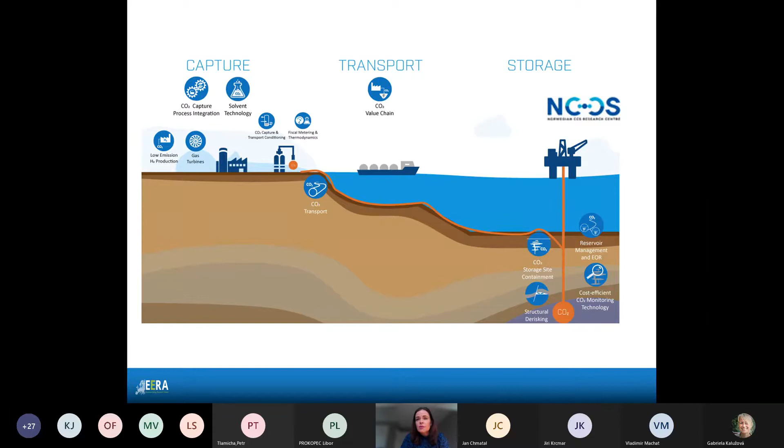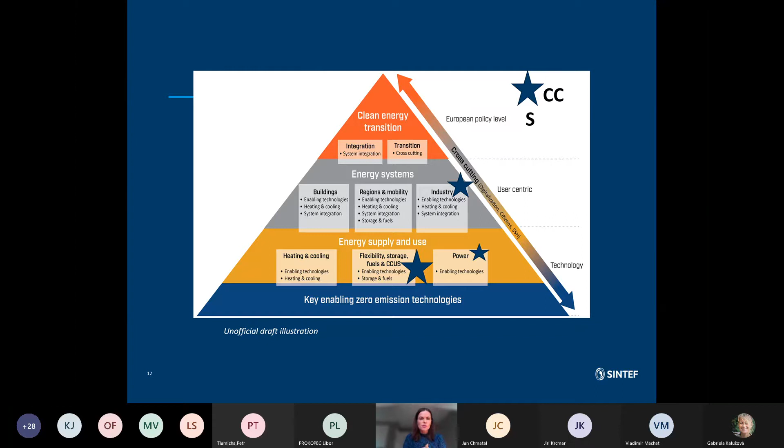It's not to show you details, it's to illustrate that during the process of asking member states if they are interested in participating in this partnership, different countries have been asked, and the colors illustrate the different countries' responses.

The interest for CCUS was quite high, and I will encourage you to have a dialogue with your ministries about this, because in the coming weeks and few months, the different countries will decide how they would like to participate and in what areas. So if you want your country to participate within the field of CCUS, you should let them know because this is a dynamic process.

From the Norwegian side, I just want to mention the climate program. In the climate program, we are this year working on our program plan, and input and feedback is wanted from the research community and the industry in this work. I'm really looking forward to it, and there will be an outreach process to ask for input on this. It's a natural stage after the launch of the Longship project.

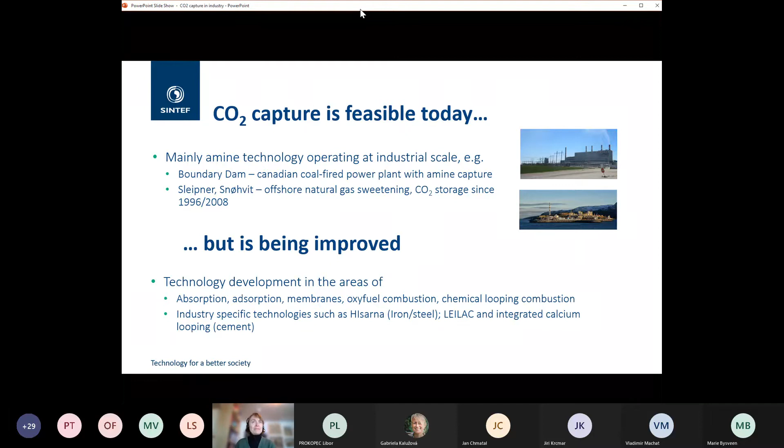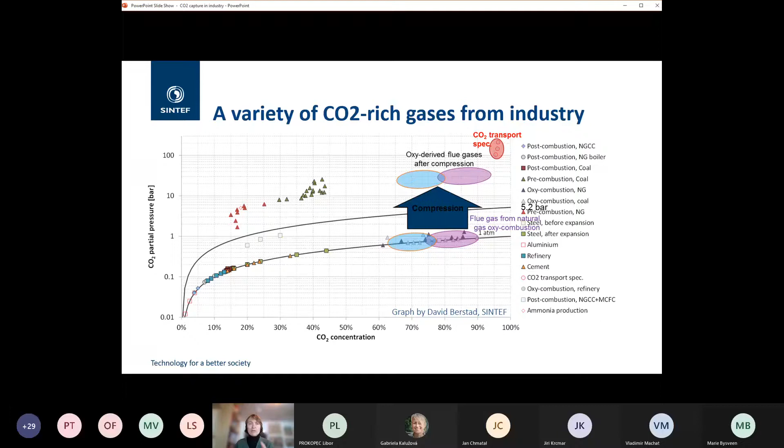So we have different pressures, different CO2 concentrations, and of course also different impurities. So it's not to say that, oh, the neighbor plant did that. You have to check what is relevant for your industry

and what technologies are available, what can be suitable for us. So I want to give you an example of how this has been done for some research for the cement industry, but hopefully there are also learnings from the methodology or approach for other industrial sectors. We operated from SINTEF EU-funded project on CO2 capture from cement in 2015 to 2018. We said we wanted to prepare the ground for large-scale implementation of CO2 capture in the European cement industry. We also have a website with videos and some presentations, a lot of material, if you're interested in looking more into this.

We looked at several different capture technologies in this project. There's oxy-fuel, where you burn with oxygen, chilled ammonia, which is an absorption, membrane-assisted liquefaction. I won't go into detail on this, but the point is there are many different technologies that can be relevant for one industry.

And they can be fundamentally different. They have different strengths, they have different challenges, and then what is suitable for me? That's the question. For instance, the energy provision is different. You can see that a couple of these use power. One uses both steam and power. Another one uses fuel and power.

And then it's all, again, back to, okay, my plant, what do we have? Do we have access to steam in our plant or from a neighboring industry? Is it easier with just power supply? Is it easier with fuel? Because a fundamental thing is that CO2 capture will require energy. It will cost money. A research project can't change this, because not requiring energy would break natural laws if somebody told you something else. Then if you're going to install something, it's going to cost money.

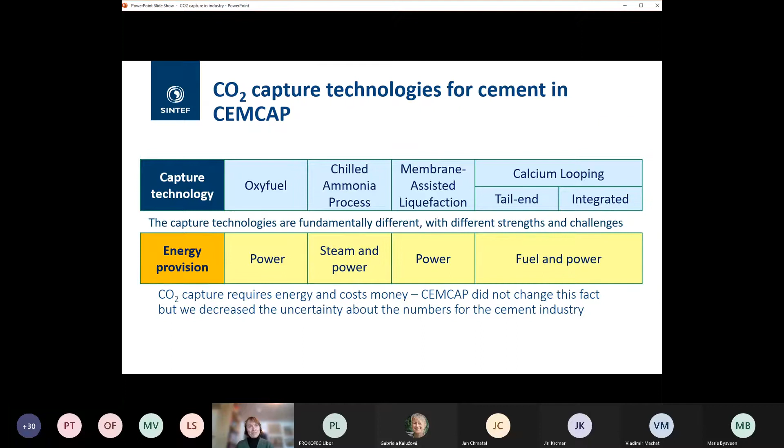But what we did in this project is that we decreased uncertainty about the numbers. We understood more about the technologies also for the cement industry. We had a methodology in this particular project where we had a tight integration between the analytical work, where we looked at the performance, the retrofitability, and a lot of experimental work to understand more under cement operating conditions, since

the CO2 concentration in cement kilns is higher than for power. You're about 20% instead of 12 to 15% that you would be for coal. And that was quite new when we did this in 2015 on such a broad scale. So we had a tight connection there. And then we also had a common framework to make sure that we did the analysis and the experimental work for the same kind of flue gas conditions.

So we had some results on the techno-economic performance. What was the cost of the clinker, the raw material for cement? What was the cost of avoiding CO2? So we could have a comparison and understanding this.

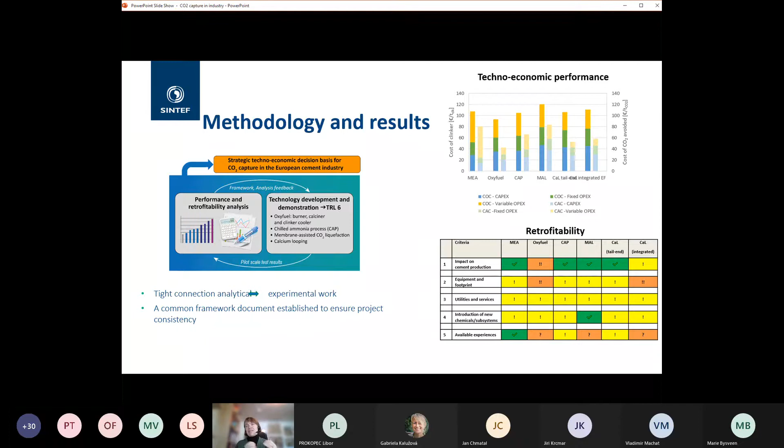And we also did a retrofitability analysis. We said it would be like a traffic light chart with green, yellow, and red, but then we realized there was nothing that was red in terms of showstoppers, so more like orange, so a little bit more challenging. But that was a very useful exercise to really go through and systematically analyze different aspects of the retrofitability for CO2 capture in a cement kiln.

Then we also did a CCU study, which can perhaps be of general interest. A lot of work has been done since this on CCU. This is an area that's really increasing in activity. What we looked at then was that, we have a potential carbon source in a fossil fuel-free future. That's what you can think when you're doing CCU.

We looked at, I shouldn't say we, but TNO was leading this study, but the consortium looked at 16 different CO2-based products. And they were evaluated with respect to market, energy demand, maturity, and what's the price, how much can be paid for this product if you produce it. As you can see, there's nothing that's green all over. But

also if you look at the CCU routes, they have a limited opportunity for climate change mitigation, which is somehow the fundamental thing why we want to do CO2 capture that we mustn't forget about. And also if you look at the quantities of the products, it's perhaps 10% of CO2 from a cement plant, or for a few cement plants that could be used for CCU was the estimate then. And there can be niche applications with positive CCUS business cases, because a conclusion from this study was that CCU will always need the S.

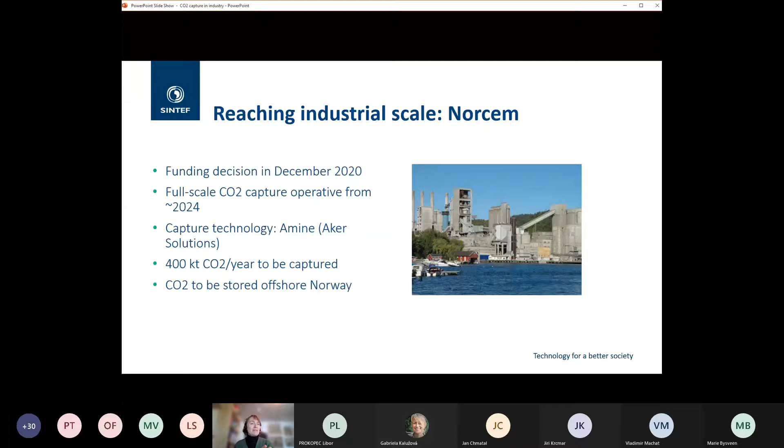CO2 capture from cement is also reaching industrial scale now, with Norcem making a funding decision in 2020. A full-scale CO2 capture will be operative from 2024 with amine technology. About 400,000 tons of CO2 per year, kilotons of CO2 per year, will be captured and stored offshore Norway.

There are lots of initial questions to ask yourself when considering CO2 capture for industrial flue gases. This is like a checklist to look at when starting a CO2 capture project: What's the pressure and temperature where you can capture CO2? What's the CO2 concentration? Do you have impurities? Do you have waste heat available? That can really drive down operating cost. Do you have space for installing or retrofitting the CO2 capture? That can be problematic in some industries.

And what are you going to do with the CO2? CCU will probably need someone who can take care of the CO2 and get it away from your industrial installation. And of course, you must always remember the quality of your end product.

Finally, if you're initiating a CO2 capture project, don't reinvent the wheel. We have, for instance at this conference, a lot of competence built up over more than 20 years in Norway, largely thanks to the climate program that Marie mentioned. There are also two important European fora you could check: the CCUS Projects Network and the Zero Emissions Platform. The CCUS Projects Network is more internal knowledge sharing between industrial projects with plans for CO2 capture, use, and transport, while the Zero Emissions Platform is the industry CCS voice towards the EU Commission. There are also a lot of reports and information available on these two websites.

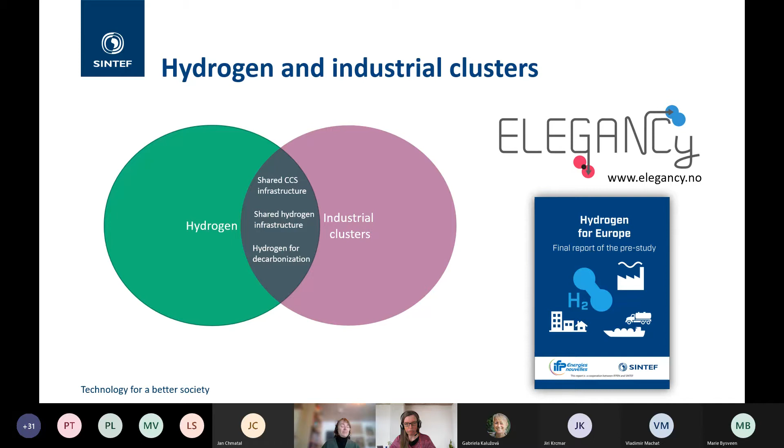Let me start with the benefits I see for the industrial cluster of having hydrogen production in the nearby areas. As I said in the introduction, we need to decarbonize the clusters. Important strategies for decarbonization are capture of CO2 at the point emitters and then permanent storage. A second alternative could also be the direct use of hydrogen as fuel instead of fossils.

In the Hydrogen for Europe pre-study, we assessed the benefit of having hydrogen production from natural gas with CO2 capture, which also requires infrastructure for transport and storage of CO2. What we saw was that if you have co-location between an industrial cluster and this kind of hydrogen production, you'd be able to share infrastructure for transport and storage of CO2. So the CO2 captured from the industrial cluster itself would be transported in an infrastructure with economies of scale, lowering the cost per kilogram of CO2 for transport and storage, thereby reducing the cost of decarbonizing the industrial cluster itself.

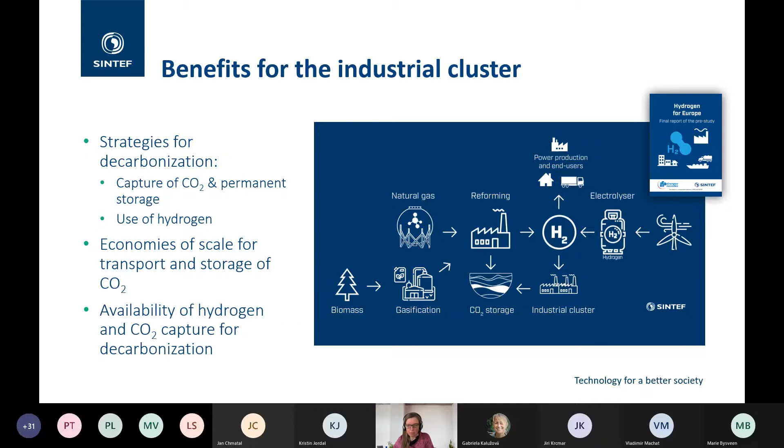The second result I'd like to show is also from work undertaken within the Elegancy project, from the UK case study. Nixon Sunny, who did his PhD within the project, has kindly let me use and present some of his findings. These are results for cost of avoiding CO2 emissions for a large-scale refining and petrochemical cluster that has scattered emission points - approximately 3.5 to 4 megatons of CO2 emitted per year at this cluster, with the majority resulting from direct combustion of fuel. The emissions have around 10 mole% CO2 in the streams.

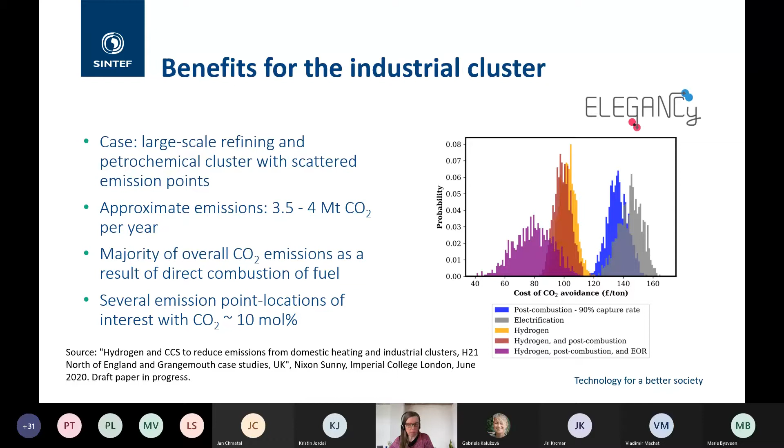And this is also quite costly. So when we move down towards the brown profile, where we have both hydrogen and post-combustion, this comes at a significantly reduced cost profile. And for this particular case study, they also did estimates for a case with enhanced oil recovery, which was seen to further reduce the costs. However, they also noted significant uncertainties related to geological reserves, market price for oil, and the CO2 intensity of the oil that emerges, which brings substantial uncertainty into the results for this last curve.

So then if we turn our eyes towards the benefit for the hydrogen economy, I would like to bring to your attention a proposed policy to boost momentum in key value chains, made by the IEA in their Future of Hydrogen report prepared in 2019, where they said that strategic development of industrial clusters for scaling up the use of clean hydrogen was key.

So they saw that you could have a growing hydrogen demand in the industries, and this could both bring down the costs of the low carbon hydrogen pathways, and by bringing down the costs of hydrogen, you can also kickstart new sources of demand for hydrogen. And in their reports, they specifically pointed towards coastal industrial clusters co-located near ports, saying that these kinds of clusters are specifically attractive.

And we have also seen the same in the Elegancy project, where, as I said, we had 5 case studies. We saw that national conditions are very important for establishing and assessing the business case for hydrogen and CCS value chains, and there were quite significant differences in terms of what was driving the business opportunity for the chains. But what we saw was that industry and industrial use of hydrogen was key to getting the hydrogen economy started.

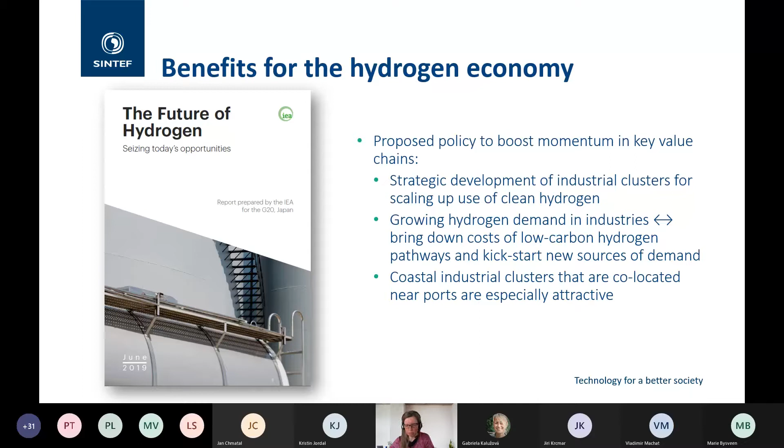So I would like to show you one final example of how industry clusters and the use of hydrogen there could benefit the hydrogen economy. This last example is collected from the Dutch case study of the Elegancy project that examined the potential for hydrogen in the Rotterdam area.

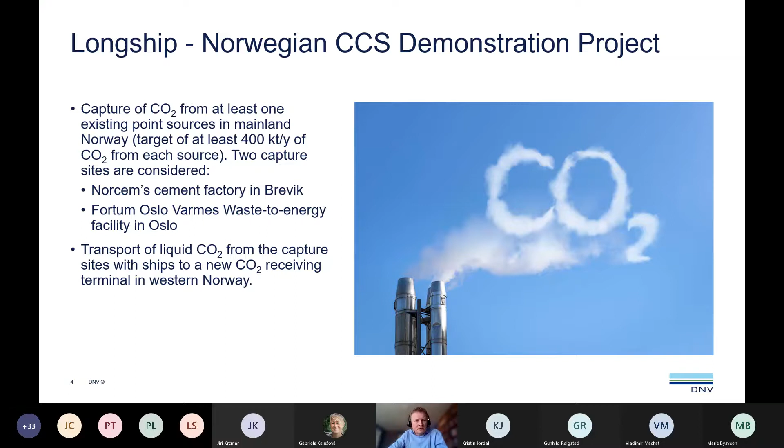To my knowledge, Norcem Brevik may become the world's first cement factory equipped with a CO2 capture plant. And we have seen that there are no other good alternatives for CO2 emissions at cement factories than CO2 capture.

The capture plant's energy demand, steam and heat, will entirely be based on surplus heat. If you have waste heat available, it can be used to power the CO2 capture. The CO2 emissions will then be reduced by 50%, from 800,000 to 400,000 tons per year. The reason why they're not capturing more is that's the amount of heat they have available. If they should capture more, they would typically have to invest in a steam generator plant.

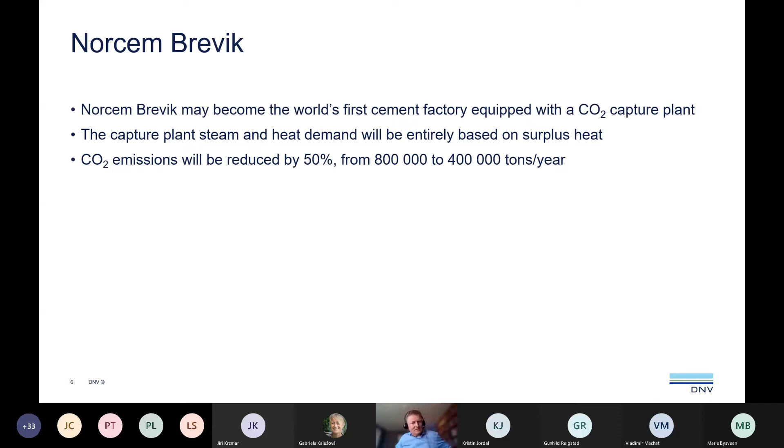When it comes to new technology, the Norwegian authorities have required that either proven technology is used, or if you have to use new technology, or if the application of new technology has significant upside, it shall be qualified. DNV has issued a recommended practice on technology qualification, which can be applied, or equivalent. For those parts of the technology identified as new technology, the technology qualification programs shall be established and executed in alignment with the project master plan.

In our RP, we define technology qualification as the process of providing evidence that the technology will function within specified operational limits with an acceptable level of confidence. So it's a requirement from the authorities to have a third-party verification of the technology, that it works as intended, and to reduce the technical risk.

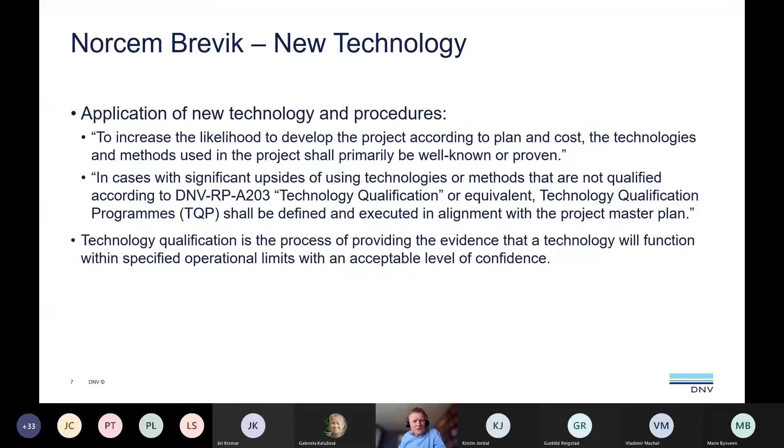Based on this definition, the following processes or subsystems were identified for qualification: the capture technology itself, which is provided and conducted by Aker Carbon Capture; the CO2 compression with integrated waste heat recovery, also a technology delivered by Aker Carbon Capture; and finally, waste heat recovery from the cement plant using smoke tube boilers, conducted by Norsk Energi, which is the provider of the boilers.

The process that DNV describes in our recommended practice is a stepwise systematic approach to ensure that you collect the evidence needed in order to have an acceptable residual risk regarding the performance of the technology. It starts with a qualification basis, which is a description of the technology to be qualified and a description of what it's going to be qualified for, so the typical operating envelope, performance targets, and functional requirements. That has been established.

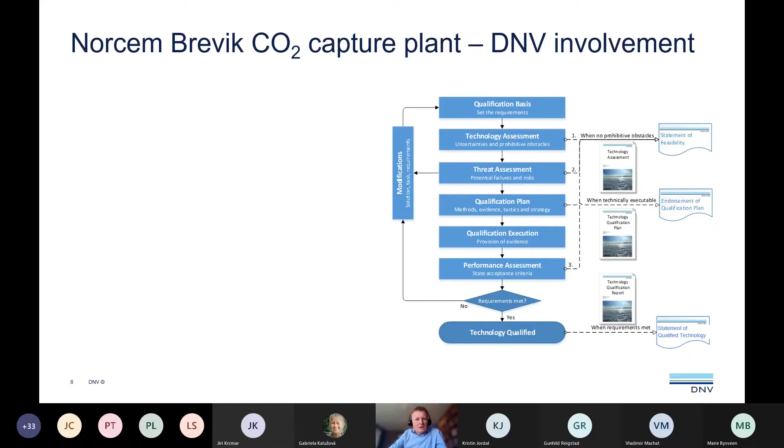In addition to this RP A203, we also have a more specific recommended practice on qualification procedures for carbon dioxide capture technology. It's based on the same process, but gives more guidance specific to this industry.

So in 2019, we ran a project for technology qualification of the CO2 capture technology. And in 2 phases, starting in 2017 and finalizing in 2019, we ran a process for qualification of the CO2 compression with heat recovery technology.

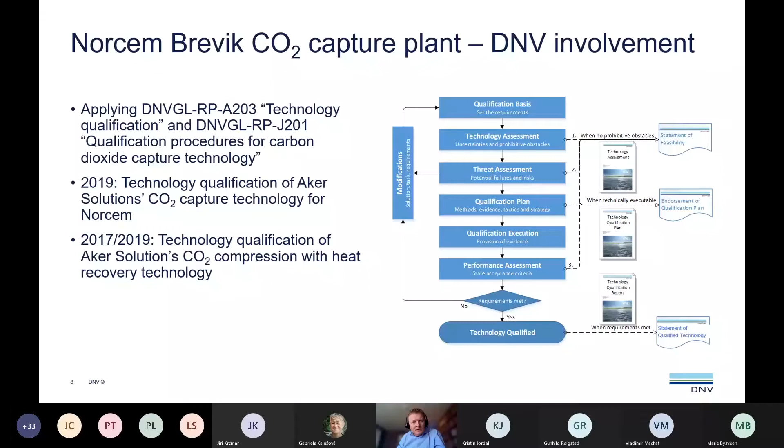So that is one major part of how you can get sufficient heat to power the capture process - by recovering the heat generated in the compression process.

Finally, we also had a 2-phase project with Norsk Energi, which is providing the boilers, and one of the main issues there, which made this defined as new technology, was the content of the flue gas and the high amount of particles in the flue gas.

So I mentioned the first steps in the qualification process. We have a technology assessment, threat assessment, where we identify novel technology and the related challenges, uncertainties, and potential failure modes.

That was mainly done in a 2-day workshop in Oslo, where we had participants from several stakeholders - technology provider, technology and end user, Gassnova, which is the governmental body regulating this, from TCM, and from different DNV offices as well. Based on this workshop, we got a list of items that we had to find evidence had been taken care of.

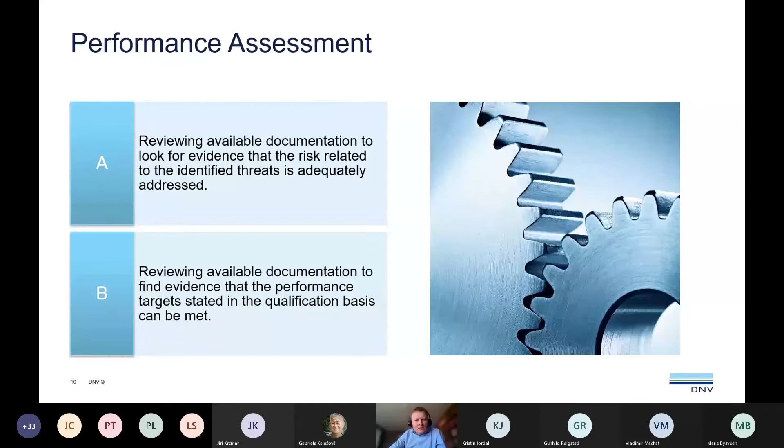In practical terms, for each of these threats that we identified - this is just an example, I don't have permission to show the details from the report - but one threat could be that the solvent concentration became too low.

We then found references in the documentation, especially from the pilot testing - MTU is mobile test unit - where we discussed the evidence, if that was sufficient to rule out this risk of a low solvent concentration.

We made then a conclusion and also an assessment of the residual risk of this still occurring.

Based on these three different projects, we have issued a statement of qualified technology, stating that this technology is ready for use within the limitations given in the qualification basis. And all these projects were specific to the Norcem Brevik plant.

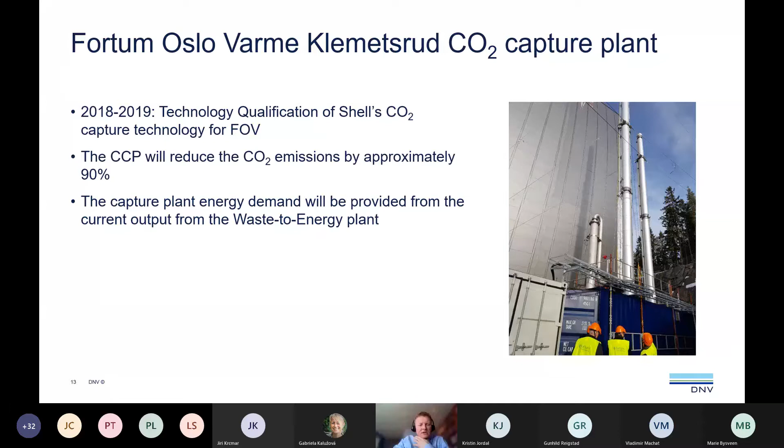At this plant, the CO2 emissions will be reduced by approximately 90%, and plant energy demand will be provided from the current output from the waste to energy plant, so it will of course reduce the energy provided from this plant.

The captured CO2 will then be transported by trucks to Oslo Harbour for storage and ship transport to the western part of Norway.

So our involvement here was also in two phases. 2018 was mainly going through the existing documentation and experience from existing plant, where the involvement in 2019 was to follow up pilot testing at Klemetsrud. Because one of the conclusions based on our involvement and also other work was that it was required to have a pilot test with the real flue gas at site. That was successful pilot testing, and we also issued a statement of qualified technology around summer 2019.

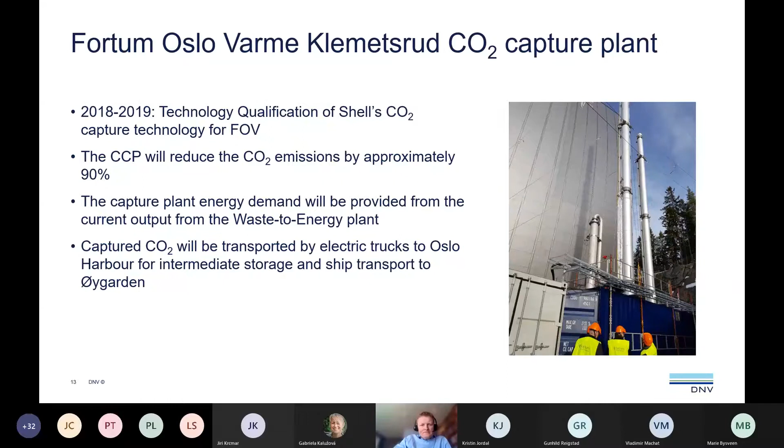So to wrap up, full-scale carbon capture processes have been qualified for the intended use in the cement industry and for waste-to-energy plants. And the first full-scale CCS project in the cement industry has received full funding from the Norwegian government, as we saw in last December. An offshore storage facility in the North Sea will be established with capacity of storing CO2 from those two capture projects, and also with capacity from several additional sources.

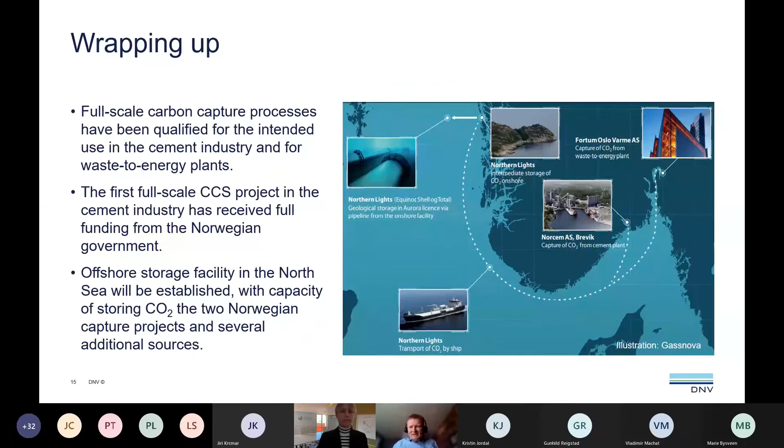Okay, that was what I intended to say today. So if you have any questions to this, please go ahead. Yeah, there is one question in chat.

Yes, so the final usage of CO2 is to store it on the continental shelf in the underground reservoir to get rid of it. There's no end use of this CO2. And yes, you will avoid then CO2 tax on this CO2. That's one of the main financial drivers behind this, to avoid those taxes.

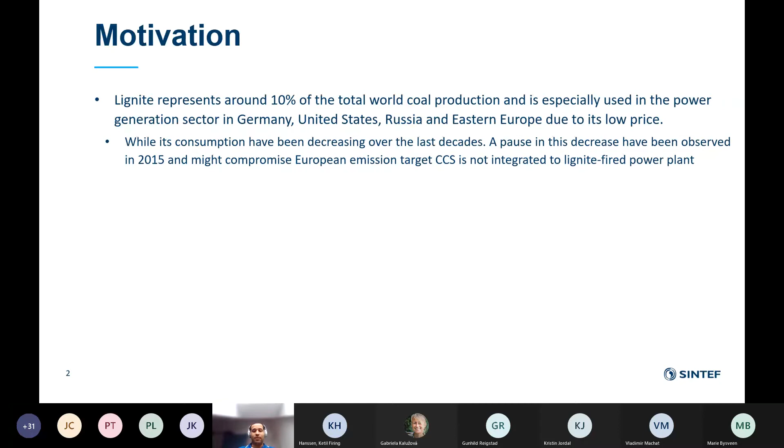So here we've been actually looking at the potential of implementing CCS on the Vresova IGCC power plant, which I guess many of you know. It's a power plant in Czech Republic, and I'll get a bit more detail on that. But the focus of the study has been to look at technology to capture the CO2 here, as the solvent is of course the most mature option and has been demonstrated, but other emerging technology could have a potential to reduce cost.

So this is what we've been focusing on, in terms of looking at in total 3 CO2 capture technologies. And also we have looked afterward at how to transport and store the CO2 coming from that IGCC, which is of course a very important issue and can be challenging, especially when you look at one plant.

So this project was actually led by the Czech Technical University in Prague, and the partners in that were SINTEF Energy Research and UJV Rez, actually. And the goal was to understand the technical and economic feasibility of CCS from this pre-combustion coal power plant.

So, as I was saying, we've been looking at the Vresova IGCC plant, which is in a sense a rather unique plant because it was actually a town gas plant which was built in the 80s, if I recall properly, and then town gas stopped being used in Europe. And then what has been done is that they actually converted that facility into an IGCC plant. So it's actually the only lignite-based IGCC plant in Europe.

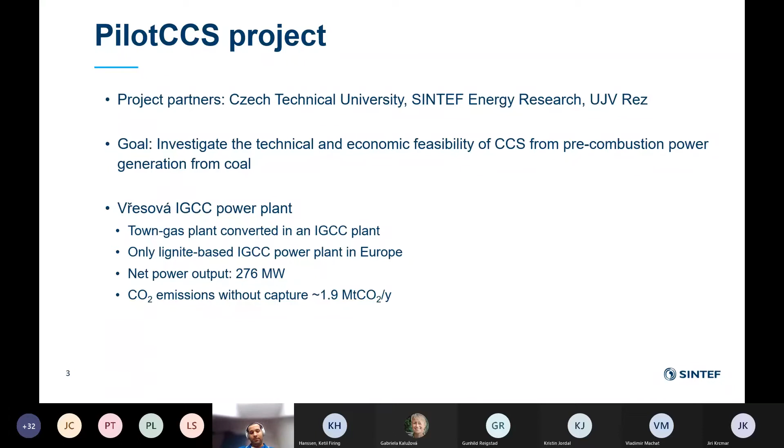If you don't know so much about IGCC, I'll provide a quick overview. The idea is that you have coal, which is first prepared and then gasified into syngas, which needs to be cleaned. There you have mainly some hydrogen, some CO, some methane, and products like that. You need a cleaning step because you have quite a bit of sulfur also. Then you recover heat to produce steam and generate more power.

Then what can happen is that you go to a CO2 capture unit, pre-combustion. Your syngas here mainly contains hydrogen, CO2, some CO, and other components at a rather high pressure, usually around 30 bar, with a high concentration also of CO2. The idea is that you get hydrogen after CO2 capture, mainly hydrogen-rich fuel, and then you add nitrogen, and this is used in a gas turbine system to produce power, and you can also recover steam to produce more power afterward.

Of course, implementing CCS will result in modification of the plant. So you need to, for example, modify how you remove the H2S to really maximize that you get just the H2S and then recover the CO2 separately.

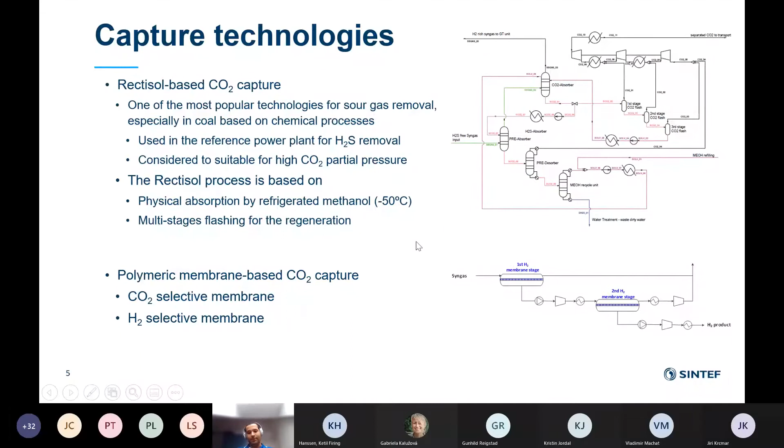So you have here a CO2 rich mixture, and then you purify it through a flash. The interesting part is that here you get liquid CO2 at around 7 bar and -50 degrees. And then you can just pump it and pass back the heat to the rest of the process to get higher temperature CO2. So it's a process which combines what is usually called CO2 capture and the conditioning also.

And then here you have your hydrogen-rich syngas, which is then passing through an expansion system to recover the heat spent into the compression, and then can go back to the power generation part.

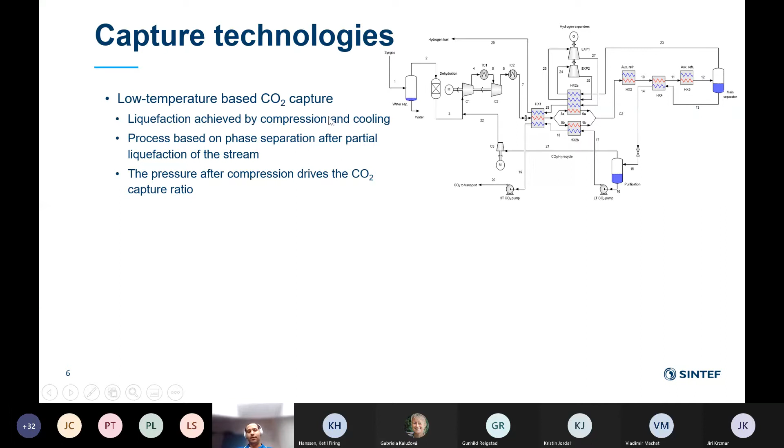One thing that can be said about that is Sintef Energy have a low temperature pilot facility that can actually capture 10 tons of CO2 per day. It's been mainly used for post-combustion capture, but I think my colleague, if I recall, is working on converting it to hydrogen. I'm not sure if it's already completed yet.

But the capture cost and conditioning overall is below 50 euro per ton, which is actually not a bad cost in early stage also.

One other thing that we looked at, because what can be challenging especially when starting a project at an early phase, is to capture everything. So we also look at what we call partial capture. For example, instead of wanting to capture 85% or 90% of the CO2 emitted by the plant, you want to only capture 50% because you rather start with something which is a bit more modest. Like for example, the Norcem plant, as was just said earlier, where they capture 40%. And what we looked at is what impact this had on the technology comparison.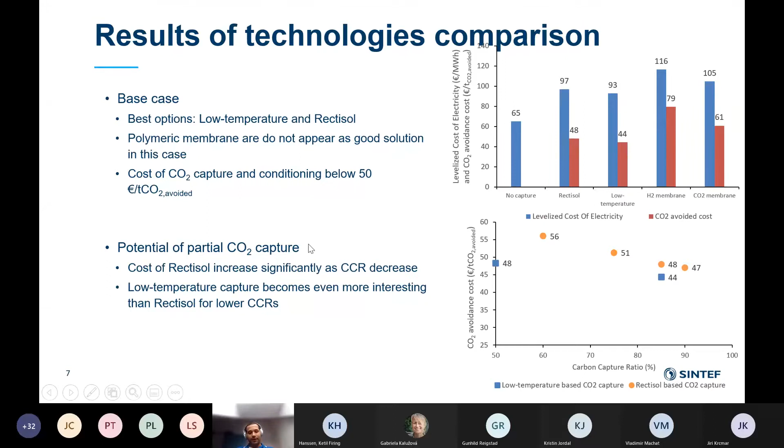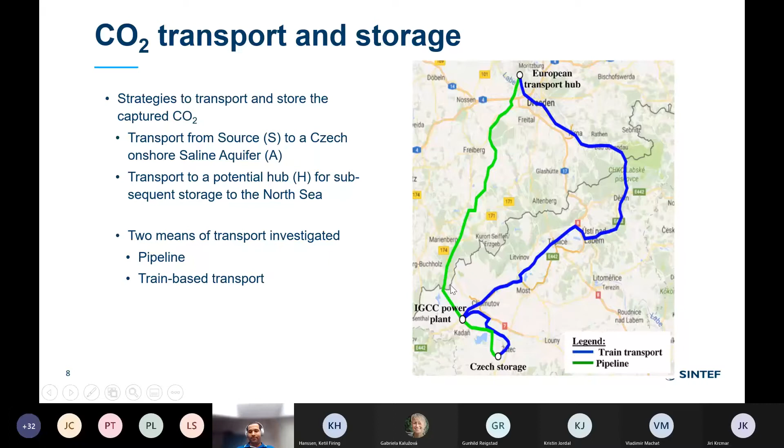And to do that, we used a tool that has been developed at SINTEF Energy called iCCS, which is a tool for integrated techno-economic and environmental assessment of the CCS value chain. Here we can combine different pieces of technology to, in a sense, evaluate overall performance and optimize different elements.

So from the IGCC plant, here we look at, for example, compression and conditioning and pipeline export for the two cases, and that implies different sets of transport distances and reboosting along the way, depending on the cases, until the storage point or the hub.

And same here with the train where you have to liquefy the CO2, export it via train over different distances. Here, the distances are not the same because you will not be able to follow the same pathways, especially for a railway. You will not build new railway, you'll rely on what you already have. And in that case, it meant that the distances were not very favorable to the train transport. And then you have to recondition and go to the storage.

And for each of these cases, we optimized the pipeline characteristics and train logistics. We also looked at the impurities that you can have in the CO2 capture stream resulting from the CO2 capture, and what impact it had on the transport.

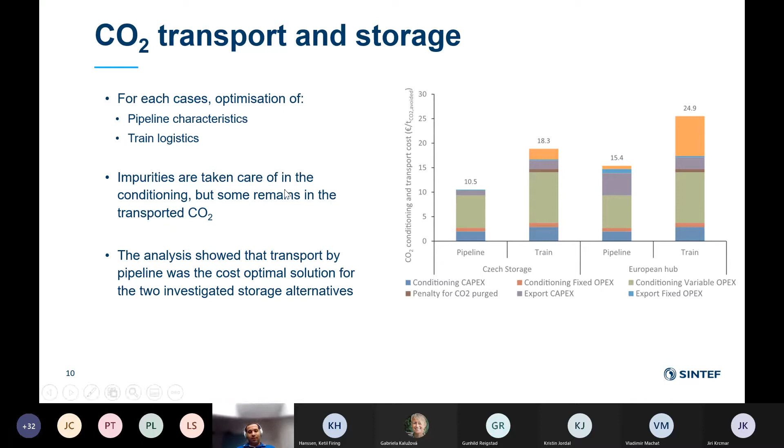The results are shown here, and basically the conclusion was that pipeline transport was better in these cases. As I was saying, the distances are shorter, so it's not very surprising. But train transport could limit investment, so that could also be an option, especially if you have uncertainties about whether you're going to have a 25 year project, or if it might expand or change at a later point.

So to sum up, we looked at CCS from the Vřesová IGCC plant. From the capture part, the best technologies are low temperature capture and the Rectisol process. Low temperature capture is a bit cheaper but less mature than Rectisol. We looked at different transport and storage options, and storing the CO2 locally in Czech Republic will be cheaper, and transport via pipeline also seems to be cheaper. Combining the capture, transport, and storage, we end up with a CO2 avoidance cost of around 55 euros per ton for the whole chain, which is actually not bad, I would say.

More generally, in terms of the value of this project beyond the scientific perspective, this has been a valuable collaboration between Czech Republic and Norway, with really good potential and achievement, enabled by having people who were more CCS experts and people who were more power plant experts in Czech Republic, who knew a lot about the Vřesová facility. That was very good from our colleague at Prague University. It's also been valuable work to support the Czech industry, and a lot of exchange of knowledge between the three institutions and the two countries.

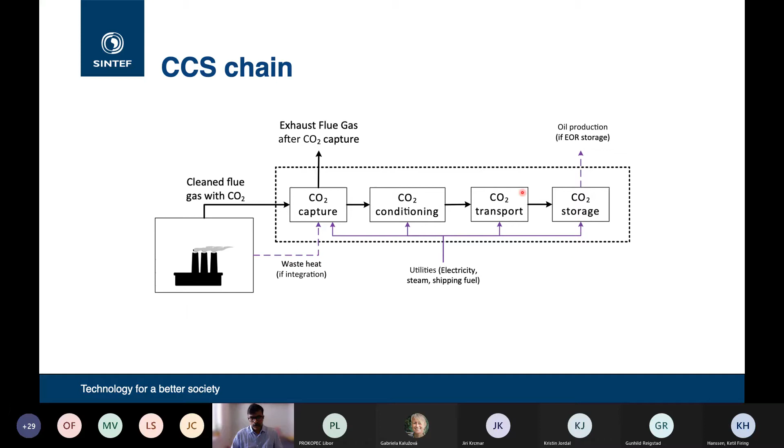In a CCS chain, what we're talking about is having the flue gas - you probably need to clean it, some preconditioning may be required. Then you go to a CO2 capture unit, then you condition the CO2, transport it via either ship or pipelines or even trains as we saw earlier, and then go to storage or possibly to a utilization endpoint. So this is the overall chain, and typically when we talk about hubs, what we're talking about is a case where we share infrastructure.

A little bit of background: CCS, when we started talking about it, was primarily to capture CO2 from really large power plants, like the one we saw earlier in the earlier presentation. But then over the last 8 to 10 years, there's been a gradual shift towards looking at industrial point sources rather than power plants.

More recently, the idea has been to focus more on industrial clusters, because you don't see that many standalone industrial point sources. Most of them are in clusters for a lot of reasons, since there's a lot of synergy in these industries, so they tend to form clusters. When we talk about industrial clusters, we're talking about shared resources or infrastructure, and these are important because of economies of scale, and also other limitations that could be there.

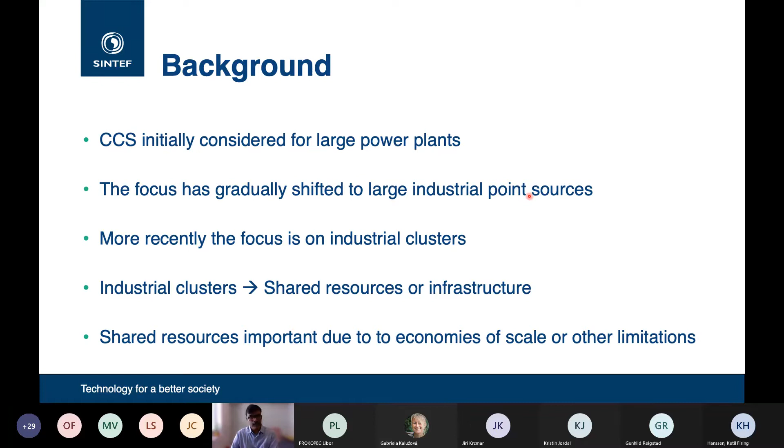When we talk about hubs, let me start from the capture perspective first, then go on to transport and storage. From a capture perspective, typically in industrial facilities, you could have space limitations or limitations in utility. For example, with absorption-based capture, you need heat for regeneration of the solvent. So an industrial facility may not have available heat for regeneration, whereas another industry may have excess heat that could be used for that purpose. So there are these kinds of constraints that could be important.

In the case of membranes, they are considered compact technologies, but they don't tend to scale up, they tend to scale out - that is, you add multiple membrane units as you increase the scale. Adsorption is somewhere in between; it exhibits economies of scale to a certain extent, but mostly scales out. In that sense, when we talk about sharing of resources, absorption seems to be the most relevant technology to look at or study.

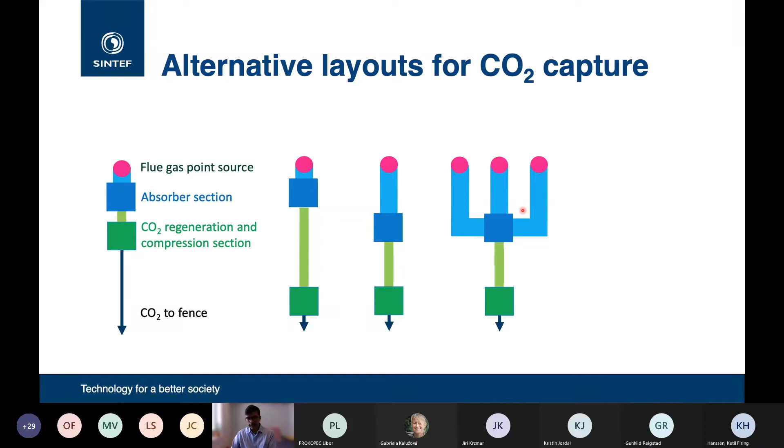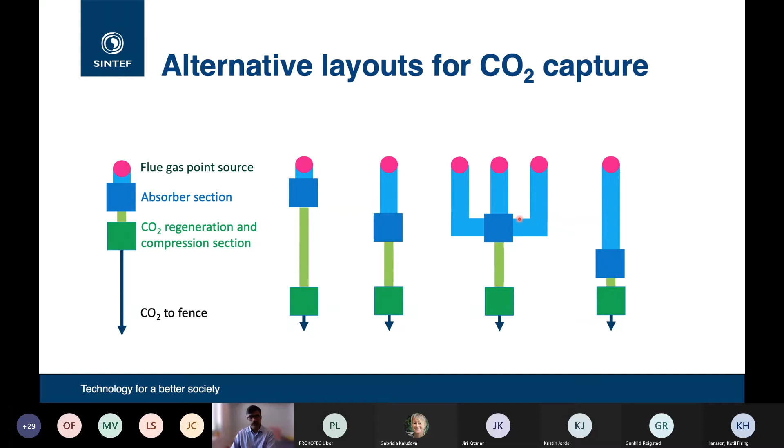So it's very much a possibility. Or you could have your absorber located a little further away from the emission source, with CO2 regeneration and compression even further away. Or you could collect CO2 from different sources into a common absorber and have a common regenerator also. Or, in a case not shown here, you could have different CO2 absorbers collected together into a common regenerator and then release it. All these different configurations are possible, and they allow us to share resources at an industrial cluster level, not just at a single industry level.

As I was saying, economies of scale are important here. The cost of the absorption process reduces with increasing size up to a certain level. Beyond that point you need to add a new absorber, because there's a size limitation - you can go up to a maximum of 12 to 15 meters in diameter for the absorption column. Beyond that you need to add a new column, so you lose your economy of scale, but up to that point, which is quite large, you do get an economy of scale effect.

So you could consider collecting different point sources into a large common capture plant. But there's a problem: the ducts needed to transfer low-pressure CO2 exhaust gases can be very expensive, particularly these large ducts over larger distances. So typically you won't build these common collection plants for absorption units unless they're very close to each other, or you really have a space limitation. Otherwise, you would tend to build them individually.

But what you could do is actually build a common regeneration plant, because liquid can be pumped over large distances - you can have a common regeneration facility. For instance, you could capture CO2 with absorption units in different plants, then have regeneration in a facility a little bit far away, but in a plant that has excess heat, so that you can regenerate it with steam that is available.

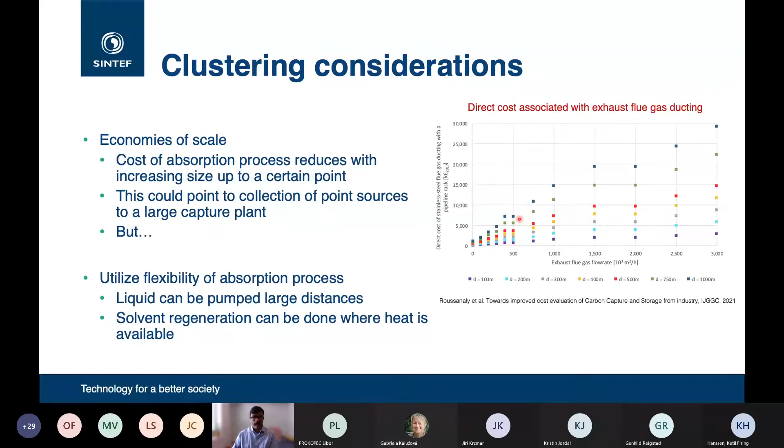So as we'll talk about later, there's also the idea of storing up in the North Sea. The CO2 needs to be transported to a storage location, whether close by or far away. You need some kind of transportation to be able to take the CO2 into a storage site.

And when you talk about that, storage costs are significantly impacted by the size. This figure shows that at these really low CO2 volumes that we're talking about from some industrial units, the cost of transport increases significantly. This is for inland pipes, but you see similar trends for offshore pipes and so on.

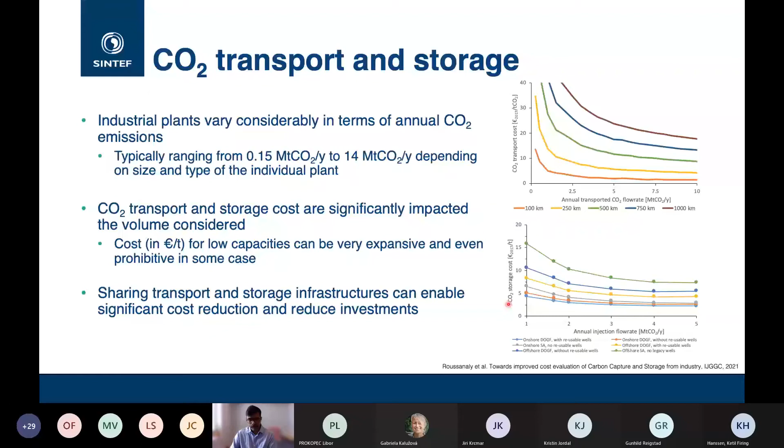And there's a similar case for storage also. The greater the injection rate in storage, the lower the cost. Again, economies of scale. So it is very important, critical here, to consider all these things together in large common infrastructure for transport and storage.

This is just to show you an effect. This is a study we did some years ago, actually 2017, for CO2 capture from the Brevik cement plant, considering different cases. For this presentation, what is interesting is that the base case is with ship transport of CO2, which is what is planned now. But if it were a standalone pipeline, you see that the cost of CO2 avoided increases significantly.

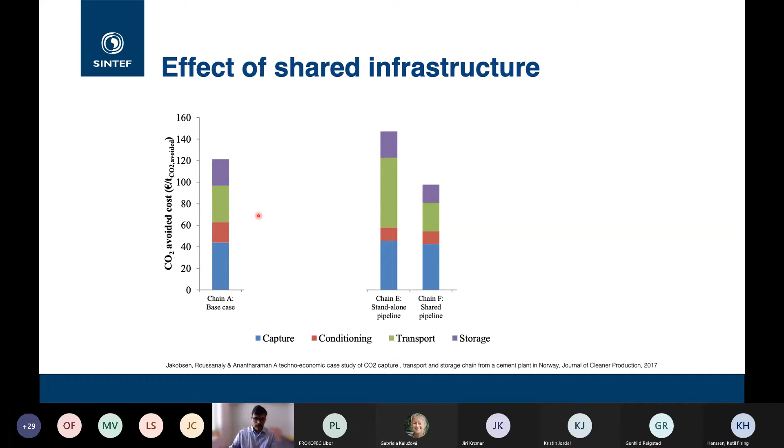Whereas if we consider a shared pipeline and storage, then the cost again reduces quite a bit. So shipping gives you more flexibility, but it is still more expensive than a shared pipeline. But the shared pipeline, as we'll discuss a little bit later, involves a lot more planning, a lot more people coming together to build such a network.

So a good example of a shared infrastructure is the Northern Lights Initiative, where what is shared is the receiving and handling facility in Norway, the pipeline to the CO2 storage, and the CO2 storage facility itself. Using a system such as this, it is possible to look at sharing this transport and storage hub, in a sense.

So what are the drivers? This is from the CCUS in Clean Energy Transitions by the IEA. We improve the economics of CCUS by reducing the cost through economies of scale. You reduce duplication in infrastructure planning and development. You reduce the commercial risks and financial costs by separating out the capture, transport, and storage components.

This could also be a trigger for investment, and this is what we are seeing now. Once the Northern Lights infrastructure is being built, announced, and in place, we see more and more people interested in having CO2 captured from their plants being stored there. And again, this is more of a chicken-and-egg issue, right? Once you have the infrastructure in place, it opens up the possibility for capture and all other things.

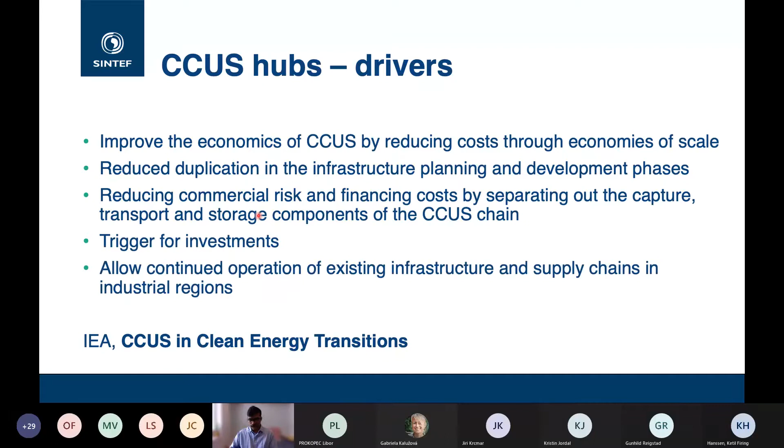So important considerations that we should consider when we look at CCUS hubs is coordination. If you're going to do things together, they need to be coordinated and have good timing in CCS ambition, in the sense that if multiple plants want to do CCS, they need to plan ahead in time. And there should be an attractive tariff for all parties, so that even the smallest emitter that needs transport and storage is charged fairly rather than an exorbitant rate.

And also we need to understand and accept the degree of risk. Lastly, when we talk about CCUS hubs, what we are talking about is when we start up and build these units, we are going to be oversizing them. So we are not going to size them for what one plant needs, but looking ahead in time, saying that there are going to be quite a few, these and this plant are going to come online sometime in the near future, and that's where all the policy things come into place.

So from that perspective, government leadership and coordination is vitally important. And that's something we've seen in Norway with the Longship project and the Northern Lights aspect. And that is what I had to present. Thank you very much. Any questions or comments are very welcome.

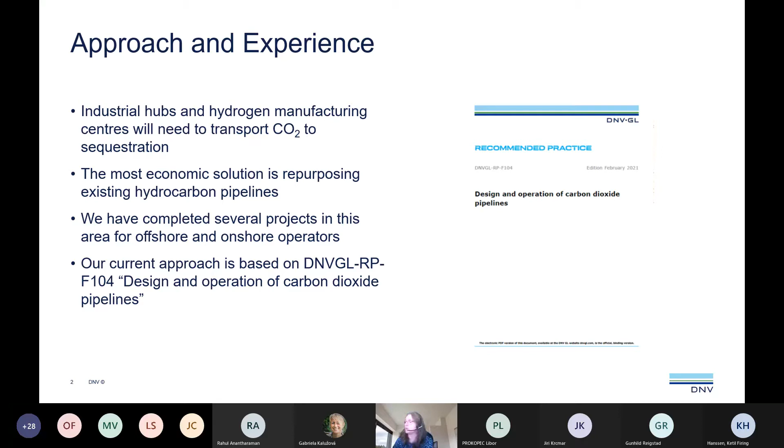It goes through a lot of the sort of unique properties of CO2, which will influence its use in a pipeline, including safety, material selection, construction, operation, and the bit I'm coming to, which is the requalification of existing pipelines. F104 goes through in a stepwise process to sort of consider the feasibility of reusing your existing hydrocarbon pipeline for CO2 transportation.

A lot of the information that has been used in both concept, design and construction of hydrocarbon pipelines will be used to basically look and see the suitability in the requalification review. So with the starting point, you've already got operational data, integrity, and this will all feed into the review.

The process involves hydraulic analysis. What is the pipeline capacity? What is the likely phase behavior you want to see? For example, typically, if you go in the dense phase, CO2 would be much more cost effective to transport over long distances. But if you have lower pressure, maybe you have to consider using gaseous CO2.

We've talked a little bit about all the different carbon capture sort of techniques earlier on in the presentations. We have to consider the CO2 quality, which will impact on your integrity, and I'll come to that a little later. Another important factor is safety. Dispersion distances are different for CO2 compared to other hydrocarbons, so that has to be considered.

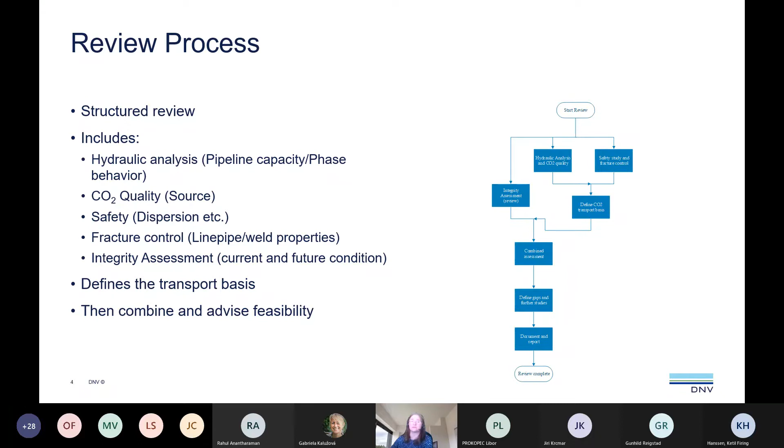Some of the key aspects which are important in this review. First of all, the CO2 impurities. CO2 impurities will depend on the source, as we know, and also the cleanup processes that are involved. Impurities that can exist in the CO2 will influence the phase behavior, which can impact how much water the phase can hold.

Small amounts of impurities can have a very big impact on corrosion, even quite small amounts actually, and there's quite a lot of work ongoing to look at the impact. As you know, water plus CO2 can cause corrosion of steel. There's factors such as the carbon dioxide pressure. If you use conventional corrosion models, you could get very high predicted corrosion rates based on these models.

The key to really controlling that corrosion, and ultimately the integrity of the pipeline, is to very strictly control the water content. If you haven't got water present, then you will basically mitigate corrosion. Dehydration reliability is the most important thing. It's not the technique necessarily, but you may want to make sure you've got a very reliable dehydration system. The other important thing is you have to have very good water detection, so if water is detected, act quickly to reduce the time that the water is in the pipeline and take mitigating actions.

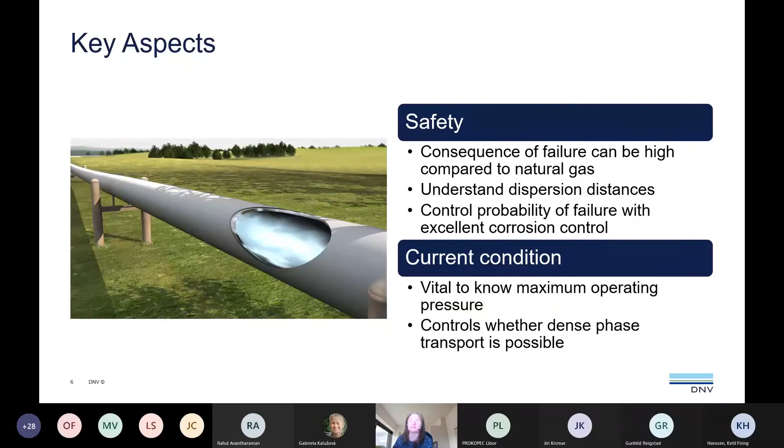One of the interesting projects currently ongoing in the UK is the Zero Carbon Humber project. Humberside is one of the highest CO2 emissions locations. It's a very industrial area, with a lot of different clients there, like British Steel, very intensive energy usage. The UK government has basically helped support this project to try and advance the UK's first net zero industrial cluster. It's actually quite synergistic, this project.

It includes a large scale hydrogen platform, and it's also collecting the emissions from various plants that will then be captured in an aquifer in the North Sea. There's also Drax, a big power station, that is actually involved, and it's using bioenergy and CCS to achieve negative emissions by using bioenergy.

At Keadby, there's a first gas-powered station with CCS planned. And the hydrogen produced from the hydrogen generation plant is being used to supply industrial users. For example, the Triton gas power plants, by mixing in the hydrogen with the existing fuel, is hoping to reduce emissions and drive better energy usage and lower carbon emissions.

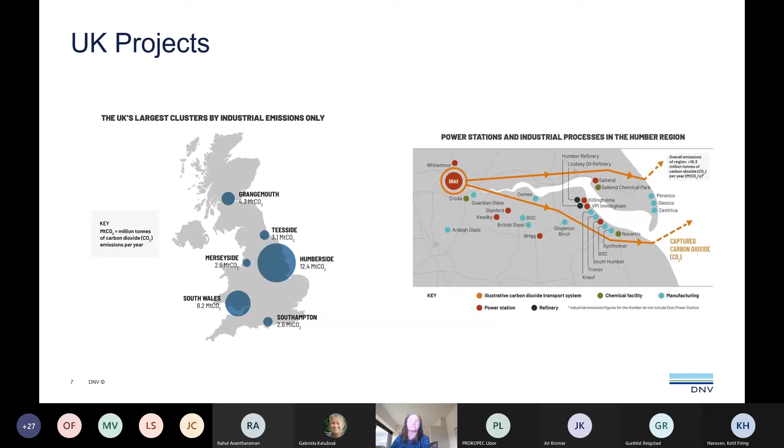So just to conclude, it is possible to requalify hydrocarbon pipelines for CO2 service, and it can be a very important part of an industrial hub, and with all the cost savings and the shared infrastructure, it can produce a lot of advantages to both the emitters and the industrial hub users.

High pressure natural gas pipelines are currently the most suitable for dense phase transport because you need quite high pressures to get to the dense phase, and this is quite economical. But you could use other hydrocarbon lines if they're lower pressure. If they're only usable for lower pressures, you have to use gas phase CO2.

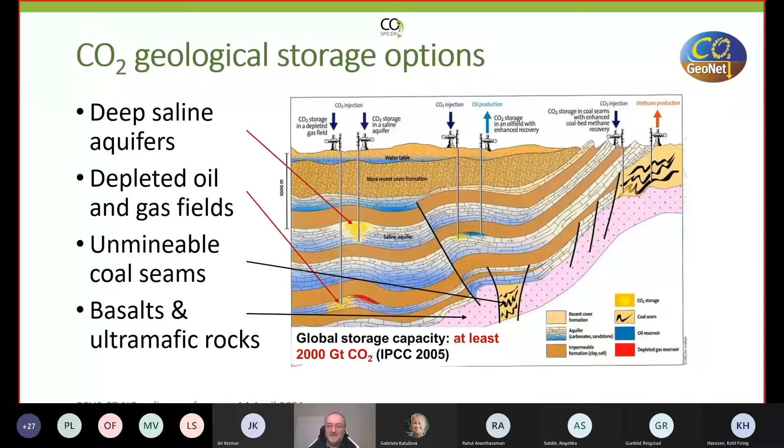CO2 can also be stored in unminable coal seams, where different processes are in place, especially the adsorption of CO2 onto the coal. The fourth option is basalts and ultramafic rocks. This technology is being developed a lot in Iceland, with a small demonstration plant there, and the principle is generally based on a reaction of CO2 with mafic minerals.

Before we go to the options we have in the Czech Republic, I think it might be useful to look a bit at some principles of CO2 storage, because not everybody in the audience may be fully familiar with how this works.

First of all, we should be aware that CO2 will not be stored as a gas like we are used to on the surface, but in a stage called the supercritical stage, sometimes also called dense phase, where CO2 has quite a high density, something like 600 kilos per cubic meter or more, and has a low viscosity. That means it can move quite swiftly through the pores and fractures in the subsurface. This supercritical stage is achieved above 31.1 degrees Celsius in temperature and above about 74 bar of pressure.

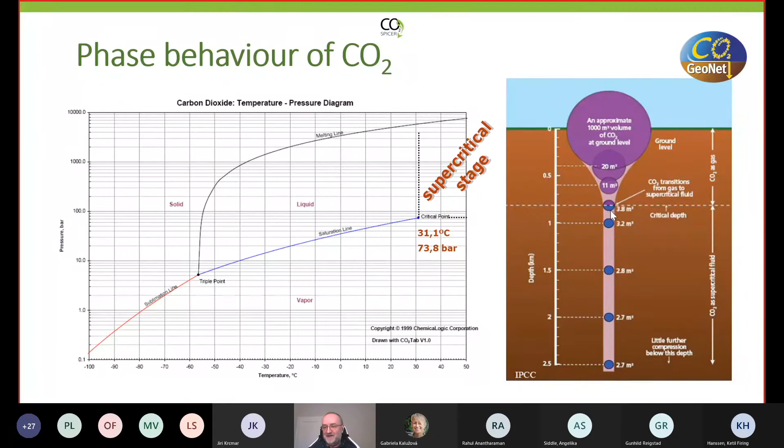In our conditions in the Czech Republic, we can achieve these conditions for storage at a depth of about 800 meters. As you can see from the picture on the right, the volume of CO2 becomes much smaller than on the surface. And once it's already in the supercritical stage, the volume doesn't change too much with depth.

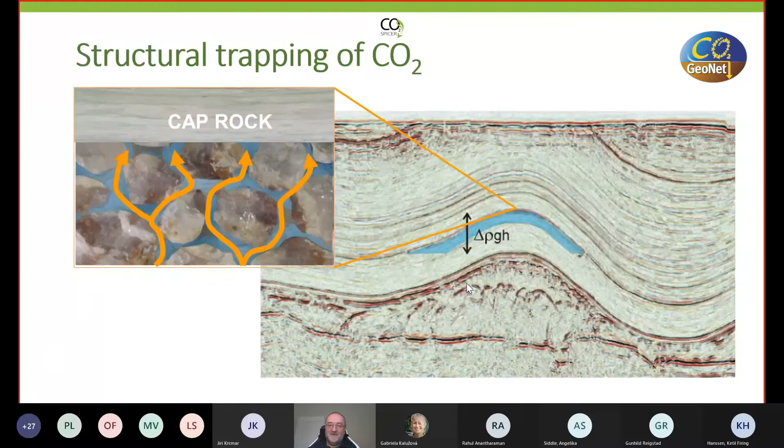So this is the main trapping mechanism, but we have three more trapping mechanisms, and they cause the safety of CO2 storage to increase with time thanks to them. The first is residual trapping, where CO2 is irreversibly caught in micropores and can't move upwards anymore. The second is dissolution in the brine, and the third is mineral trapping, when CO2 reacts with minerals and creates chemical bonds.

So what are we looking for? We're looking for a storage site. We have some criteria.

Geological criteria would be the capacity - we need a large enough pore volume to store the intended CO2. Then we need injectivity, based on the permeability of the reservoir, which reflects its ability to receive CO2 at the supply rate we want. Finally, we need containment, so we need an impermeable cap rock, and this cap rock must have good integrity.

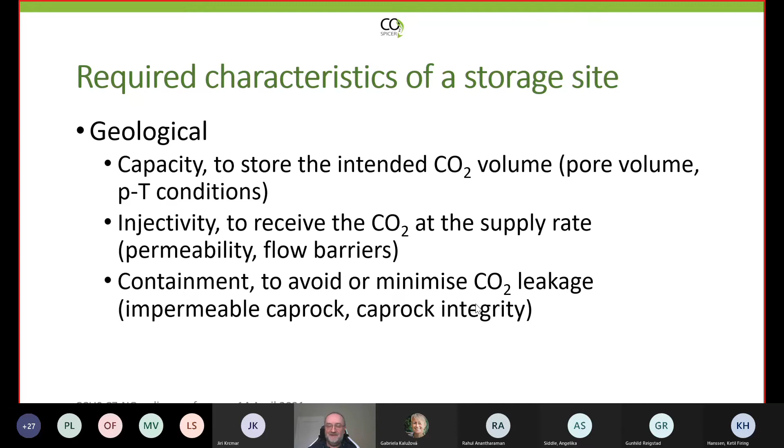Then we have, of course, economic criteria like the distance from the source, existing infrastructure, and data availability, and other criteria like conflicts of interest - for instance nature protection - and public acceptance or public support, which in our conditions onshore in continental Europe would be very important, I think.

So let's look at the Czech Republic and our storage opportunities. Here we have the geological map of the Czech Republic, and the blue lines mark the sedimentary basins. Everything you see in reddish, brownish colors is unsuitable - these are crystalline or metamorphic rocks.

So we need to focus on the sedimentary basins, and unfortunately the biggest ones of them are generally too shallow for CO2 storage, like this big one in green here - this is the Czech, or Bohemian, Cretaceous basin. So in principle we have something like four basins where CO2 storage comes into question.

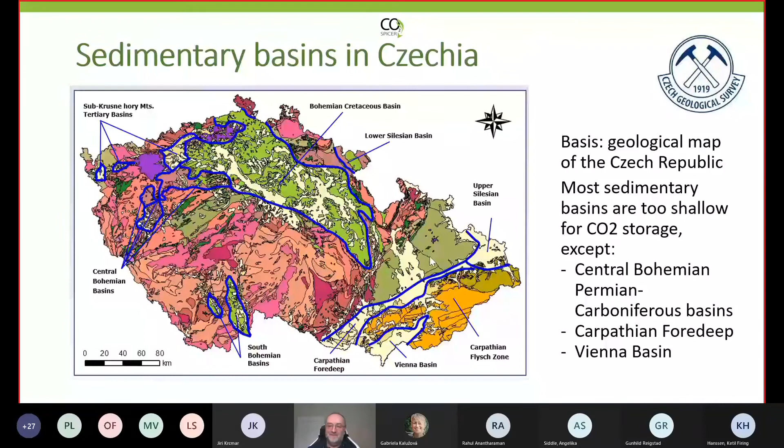And then we have identified some opportunities in the coal fields of the Upper Silesian basin. I must say the level of assessment is not the same for the eastern part and the Bohemian part, because in the Bohemian part we are mostly on basin scale, generally due to lack of more detailed information, while in the eastern part, in Moravia, we have focused on defined structures already. These are some figures coming from this assessment.

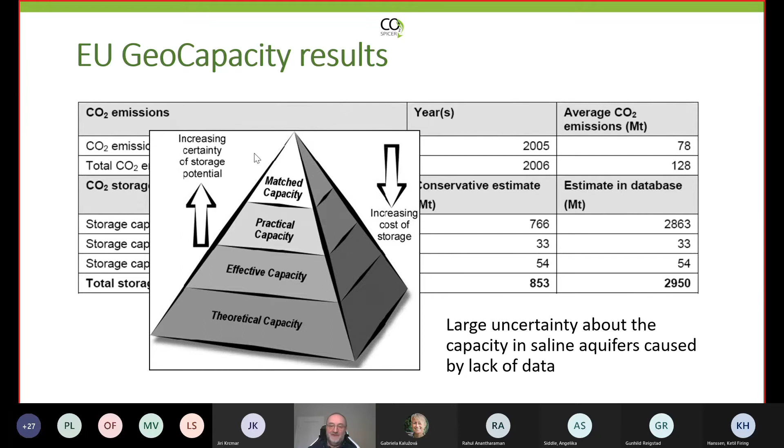And this can be illustrated by this storage pyramid - as you go from the bottom to the top, you increase the certainty of the storage potential. Especially for the Bohemian part, for the Central Bohemian basin, we are mostly on this lowest level of theoretical capacity, while for the Moravian part we are more towards the effective capacity, moving upwards with increasing certainty, but reducing the storage potential.

The next step in the capacity assessment was the CO2 Stop project, funded from the EU Framework Program, finalized in 2014, and this is the most recent pan-European database now available. It's available for everybody through this web link - it's the EGDI portal, the European Geological Data Infrastructure, run by EuroGeoSurveys, the Association of European National Geological Surveys. You can find there all the information, including links to the database, so all the data for all the countries involved, including the Czech Republic, are available on this portal.

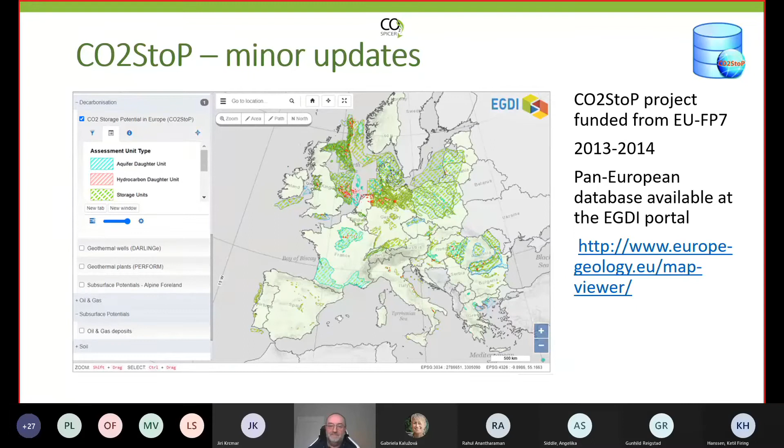We were very much hoping that CO2 EOR might be a kickstarter or driver for development of CCS in the Czech Republic, combining two or even three possibilities of revenues: first, the hydrocarbons produced and sold by EOR; secondly, the revenues from EU ETS, avoided emission allowances; and finally, also some incentives.

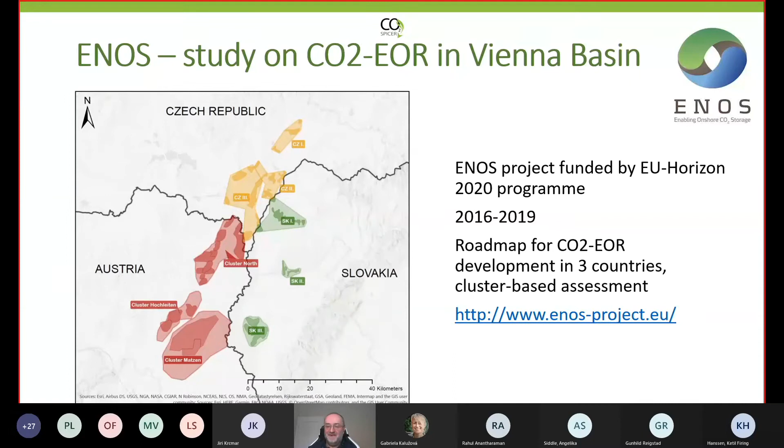Unfortunately, this will most probably not be the case, because CO2 EOR is not on the list of sustainable investment technologies, as mentioned by Marie Biswen in the beginning. So there will not be any incentives possible for CO2 EOR projects, even if combined with CCS. Secondly, oil prices have been quite low recently, so the economy here, unfortunately, doesn't work.

Maybe at the very end of my presentation, let us look at the regulatory framework. We have the basic legislation in place. You might know that we have the EU CCS directive that regulates CO2 storage in the whole EU and must have been transposed into the national laws of member states. In our case, this was done by Act number 85 from 2012.

The Act had some limitations for CO2 storage. One of them, fortunately, has already expired: there was a ban on industrial CO2 storage that expired on the 1st of January 2020, so now CO2 storage is generally allowed. The other limitation is the amount to be stored in one site per annum, which is limited to 1 million tons of CO2.

To add to the basic legislation, I have to say that the implementing regulations are still incomplete. So it looks like everybody is waiting for the first application for the storage permit to start things moving, I would say.

To conclude, let me state that the geology of the Czech Republic provides some, I would say, maybe limited CO2 storage capacity that would enable storing emissions from hard-to-abate sectors and maybe a bit more, but not much more. The main capacity is in saline aquifers, followed by hydrocarbon fields, but the storage potential of aquifers needs further research and exploration to be verified. Unminable coal seams and basalts or ultramafic rocks represent an opportunity that, however, needs further research to be confirmed.

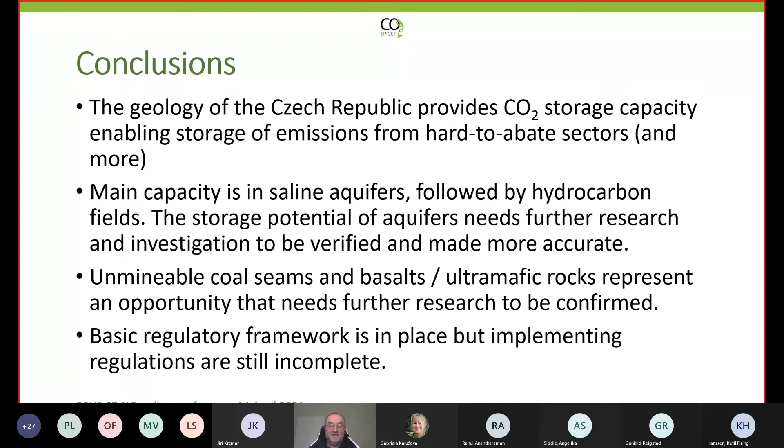As I mentioned, the basic regulatory framework is in place, but implementing regulations are incomplete, which leaves a lot of decision power on the regulatory authority, which is the mining authority of the Czech Republic.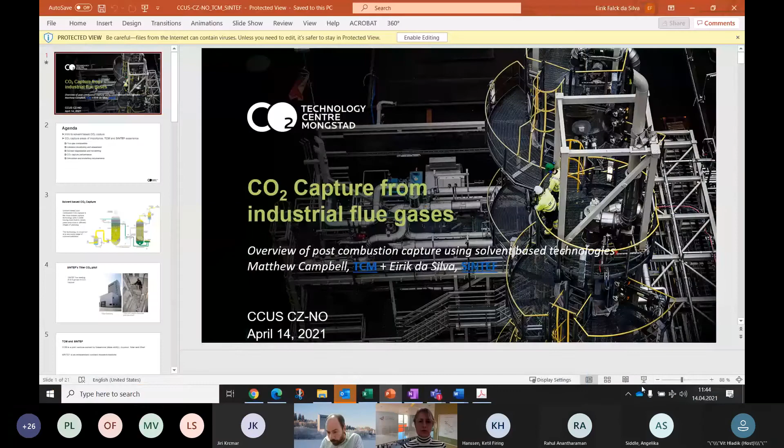My name is Eirik da Silva, a research manager at Sintef Industry, and I'll be doing this presentation together with Matthew Campbell from TCM. We'll be talking about CO2 capture technology, going a bit into specifics, but I realize there's lots of technical information today, so I'll try to focus on the main points here.

And so we'll give you an intro into solvent-based CO2 capture technology. And it's far from the only capture technology. As already been mentioned today, there's several technologies out there, but it is the most mature and it is commercially available today.

And so based on our joint experience, we'll talk a bit through different issues that one has to be aware of with this technology. And I realize for some of you, this is way too early to get into this level of detail, but at some point, if one goes into a project and starts communicating with the vendor, there are issues. Okay, so there will be some information in this presentation, but I want you to focus particularly on this slide.

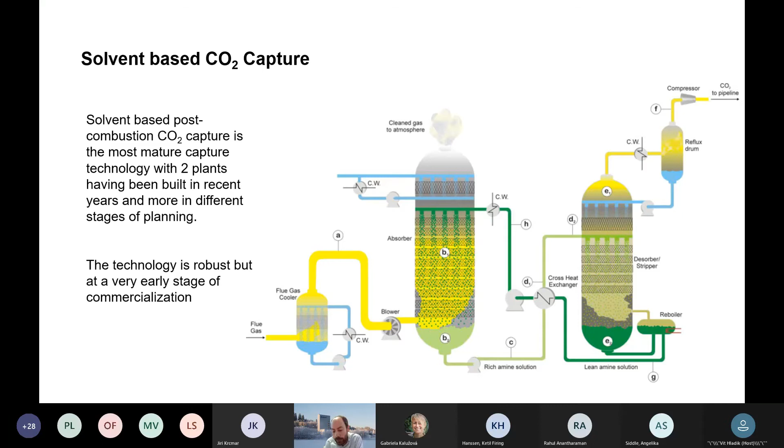Another major vendor is Mitsubishi Heavy Industries of Japan, and they're also represented in Europe. So there's maybe 5 or 6 major engineering companies that can offer this technology today. But there's still work ongoing to improve the technology and further reduce risks.

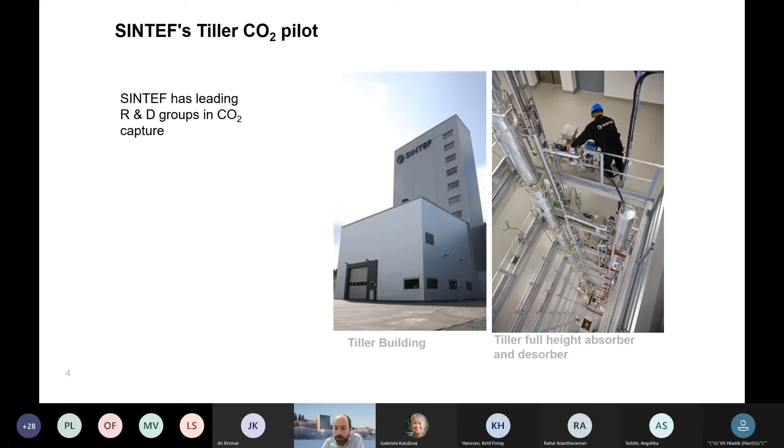So briefly about SINTEF. We have our own small pilot unit, but it is designed for development of technology, testing of new solvents, that type of thing. And so SINTEF is very much R&D.

And briefly about TCM and SINTEF. TCM, I guess we'll return to this, it is a joint venture owned by the Norwegian state and 3 energy majors: Equinor, the Norwegian well, Total, and Shell. While SINTEF is an independent contract research institute.

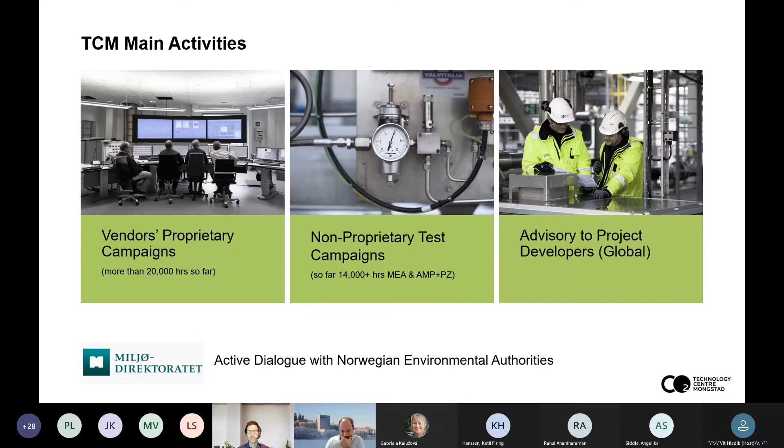And the last real bucket of experience we have is our active dialogue with different environmental authorities. Our test facility in Norway and in Europe was the first of its kind that looked at emission permits and modeling, and I'll touch upon this later. But for any project now that's moving forward, these requirements for emission monitoring and permitting will be of higher importance. So we have a division at TCM that could support with this.

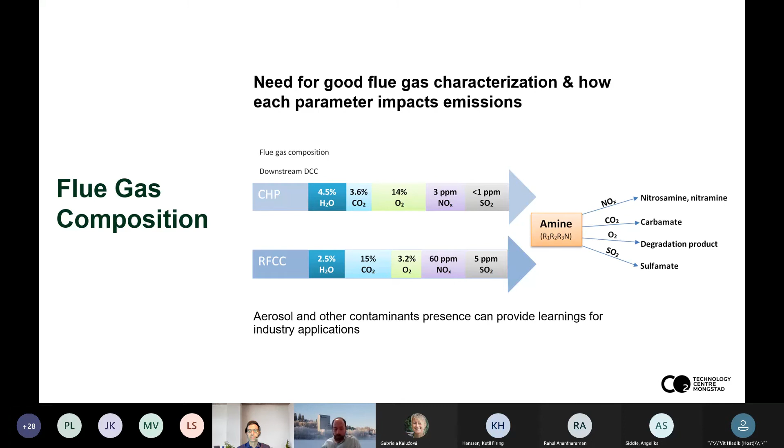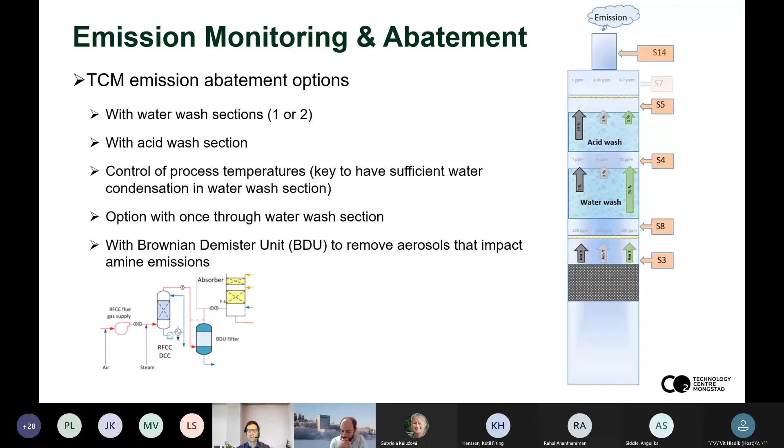As I mentioned at the beginning, we have a division at Technology Center Mongstad that has worked with experts in the industry, different universities and groups, to understand what type of atmospheric chemistry occurs when emissions leave the absorption tower, and what type of dispersion models are used to predict the amount of amines, nitrosamines, and other degradation products in the water, surrounding area, and air. This forms the basis of the emission permit, where we tell the operation of the plant to make sure they're below X ppm of amine, X ppm of nitrosamine, and it's the operations' job to make sure we always stay within that level.

These type of considerations are required for commercial scale projects, and our group from TCM can help if you want this information supported in a feed study as you move through the whole project.

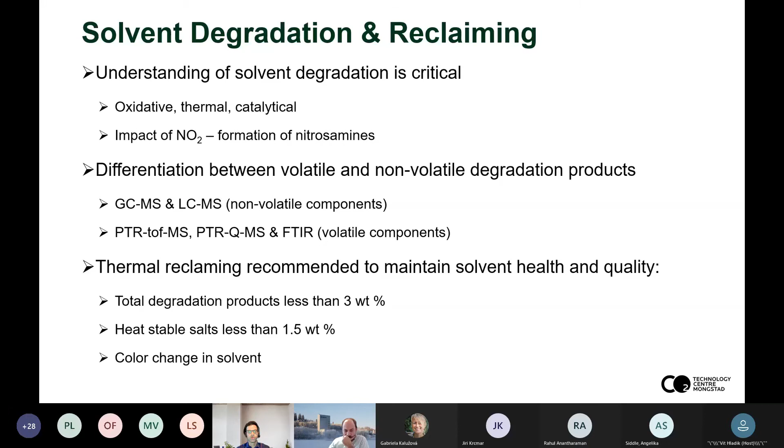At the bottom, that's where the degradation products leave and go into a hazardous waste treatment facility. Over the years we found ways to optimize this by adding some caustic, which neutralizes the heat stable amine salts and liberates your amine. We also add some water to the reclaimer waste to make sure it's not too viscous.

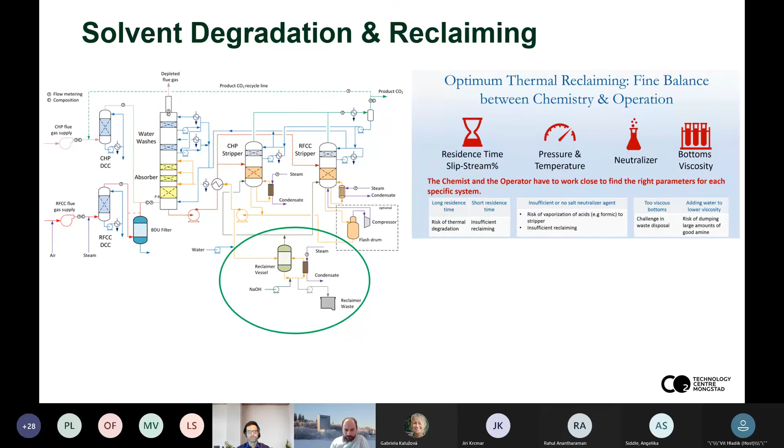There are many areas or parameters that should be considered when optimizing a CO2 capture plant. For example, you might target a CO2 removal between 65% and 99%. You might ask, how do we do this? How do we find what's optimal? All of these parameters would be considered when trying to optimize the CO2 removal and the amount of energy needed to capture the CO2.

It's really a case-to-case study. It depends on your inlet flue gas concentration - are you at 3%, are you at 15%? What's the amine solution you're using and its concentration? What's the temperature? If you're at a colder temperature, typically the capture will be more efficient, but if you want to do capture at 50 or 60 degrees C, it will be more challenging.

Also, do you have any constraints on liquid to gas ratios, temperatures in your reboiling system, and what's your packing height? We could speak about this in detail if you have questions, but all of these parameters will affect the cost of implementing the CO2 capture project commercially.

And I think there's one more slide, Eric. So basically, what's really important when you want to do a commercial project is that the technology vendor has to have a model that can demonstrate the effectiveness of their technology. For SINTEF and TCM, we've developed a rigorous model for MEA and Cesar-1.

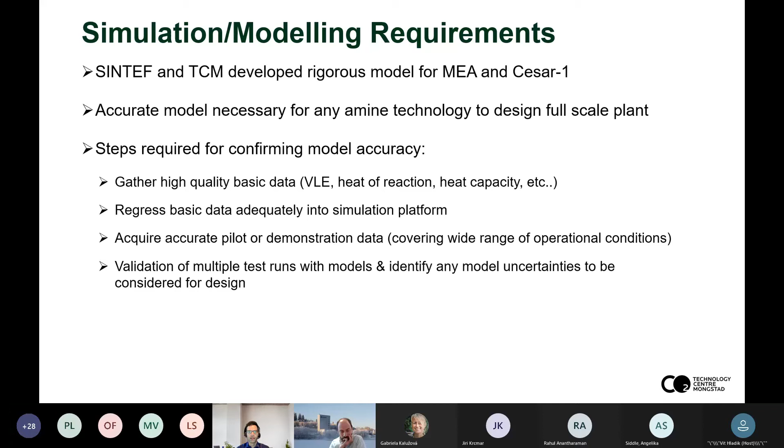Just a few words in summary. We went into quite a lot of detail here, and this would be something you would require when going to a FEED study. So what we're looking at is a reasonably mature technology. It is commercially available, but there are still a few projects out there, and there are still all these technical elements that at some point have to be considered. A big step in any new project is to make your choice on the vendor, and there it's good to be informed before you make that choice and make sure you get the best technology for your specific needs.

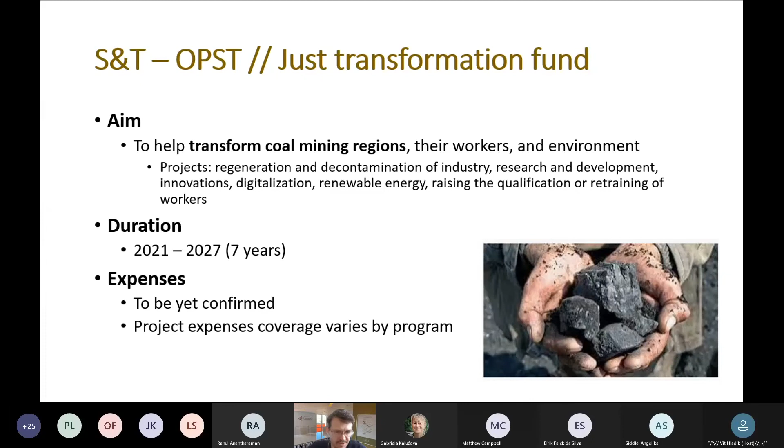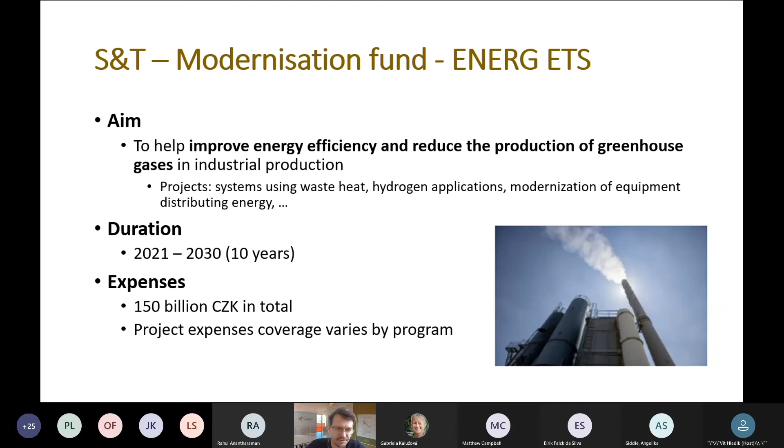Modernization Fund and this sub-program ENERG ETS and ENERG - these two sub-programs from the Modernization Fund will be available very quickly. In May we can expect first calls, so this is a new tool, but it's available very quickly.

This was very quick information from the perspective of the traditional funds - European structural and investment funds available for the next 7 years. Outside of that, there's a new program called the Modernization Fund, and all these financial tools are ready. Don't hesitate if you need help using these programs, because they really are ready to finance your solutions in CCUS projects.

And I will give the floor to Gabriela. She will continue with information on the Innovation Fund and some other financial possibilities.

Okay, thank you, Michael. Well, as my colleague decided to have it in English, I will continue, obviously, because I have the international part of those programs. I just kindly ask you, Michael, to give me management of the screen.

Okay, just 1 minute. Or I can give you a hand and skip the slides. Please, maybe it's easier. Yeah, you can see, so just let me find my slide. My part will be definitely shorter. Okay, yeah, we are here.

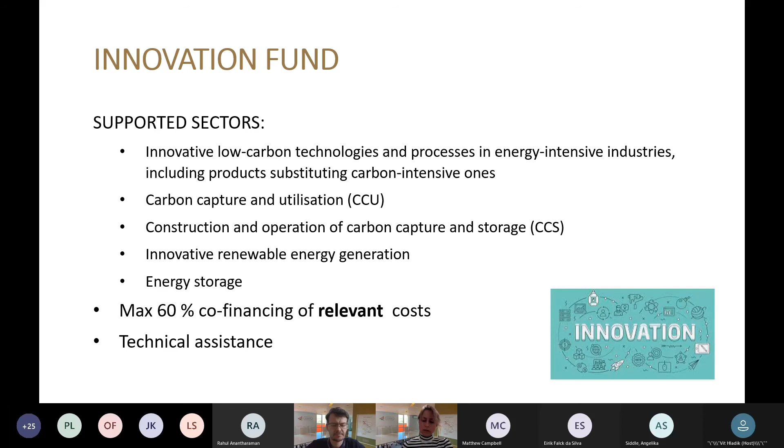I should also inform you that you can ask for technical assistance when you think about preparing a project to be financed through the Innovation Fund. You can ask for and get technical assistance because, as I said, project preparation is rather complex.

Then it's evaluated, and if the project meets expectations or requirements, it can go to the second stage of evaluation. Only companies that succeed in the first stage are invited to the second stage.